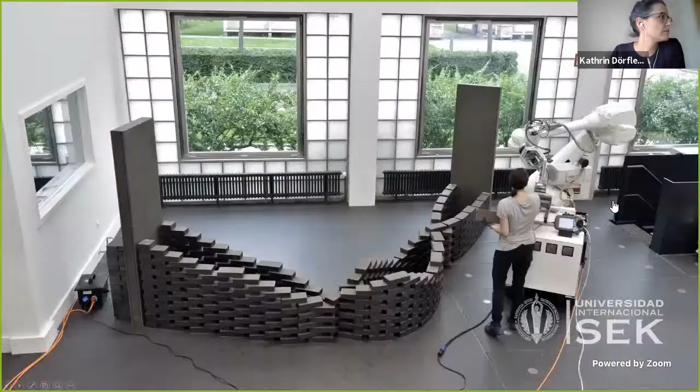I will start with a short video compilation of a few projects that I have been doing during my PhD period at Gramazio Kohler Research at ETH Zurich, in which we tried developing autonomous processes for robots, not in the lab, but as already mentioned, out at the building site.

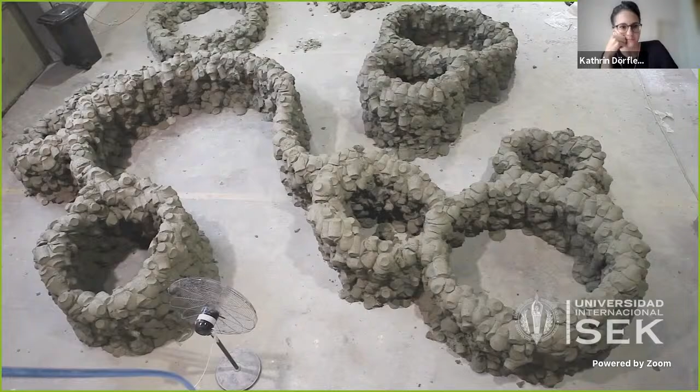So what we tried here was to bring robots out from the lab directly on building sites, and we did this in various processes with various technologies, with various different building processes.

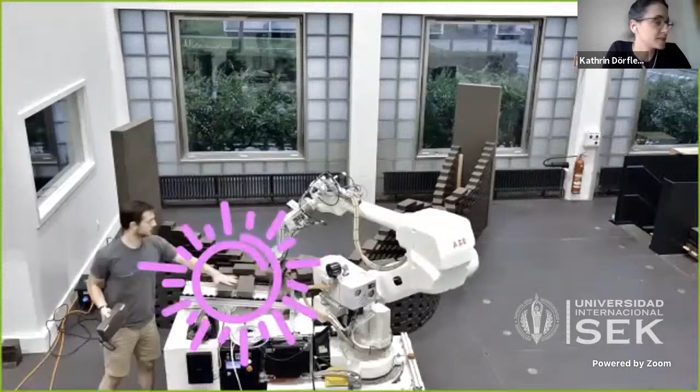And all of these videos have one thing in common, something that we have not been really focused on, but in retrospect is kind of important to recognize. And what they have in common is not the robotic part, but concerns basically the people, which you see popping in and out in the videos.

So I like to show these videos two times just to make it more apparent that in retrospect, when looking at these projects, one of the main questions that keeps appearing upon reflection is the following: if the manual material feeding and the robotic material placement is the ideal task distribution between humans and machines, or if we can do somewhat better.

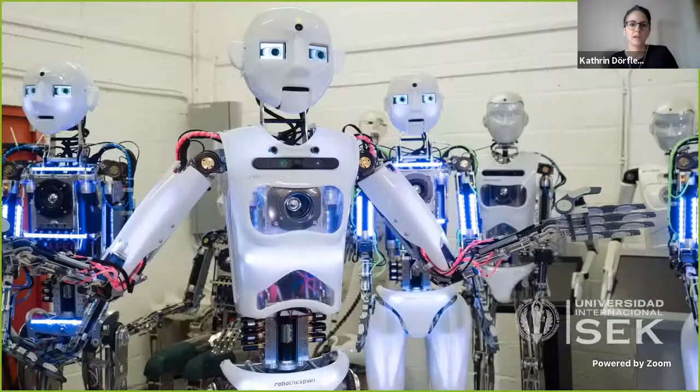So when we look at today's machines, they are not purely mechanical, but they are reprogrammable digitally. They can be connected with sensors and smart control algorithms, which ultimately radically expands their flexibility and their space for application. So if we want a hybrid human-robot team or a hybrid human-machine future and realize the vision of a collaboration between humans and machines, we think that the trick is to get humans and machines speaking to each other.

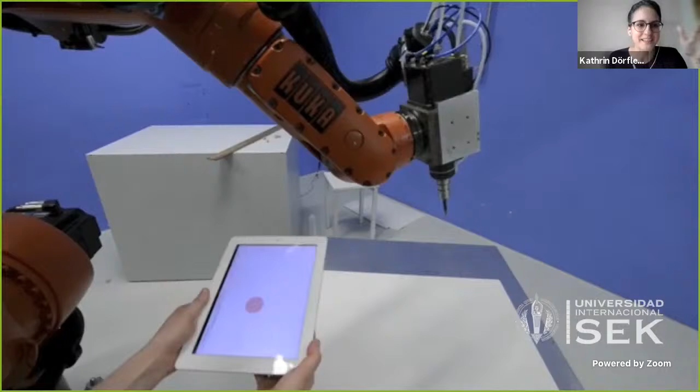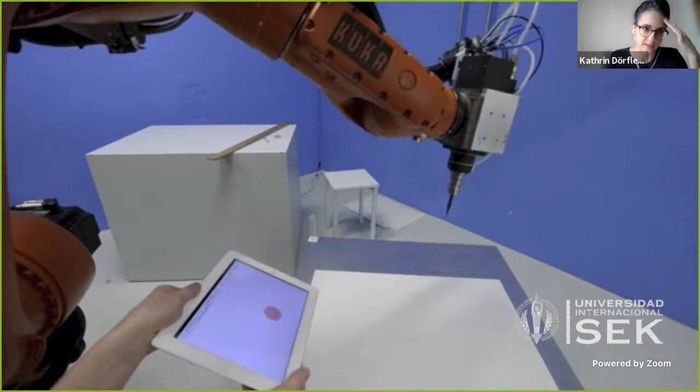So this is already more than 10 years back, where my colleague Romana Rust, a long-term colleague and collaborator of mine, and I were playing around in the architecture faculty's digital fabrication workshop, where we got this robot manipulator, and we were both caught by a fascination for these robots, but not as a tool for automation, but rather as an extension of the person's hand.

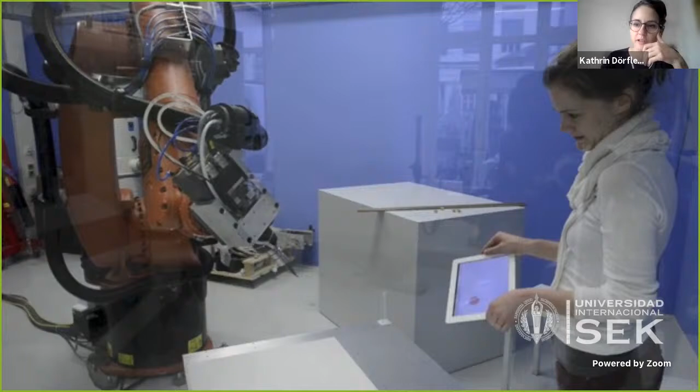So this was one of the first tests that we did. We used the iPad's orientation sensor to control the orientation of the robot's end effector in real time. And back then we started to envision the robot as a co-worker and an extension of a person, and in constant interaction, speaking to each other.

To explore questions along these lines, in a very early project, it was actually a master thesis, we developed a system which we named SANS, for Sensor and Actuator Network, which we thought is like no borders, very naive, I'm aware. But we envisioned basically a system where people and robots could be connected via various sensors,

like a camera, iPad, or 3D digitizer, bringing information from the physical world to the digital model, and to establish a possibility for humans to interactively take part in a fabrication process by enabling designing during fabrication and influencing and moderating digital fabrication processes while they are progressing.

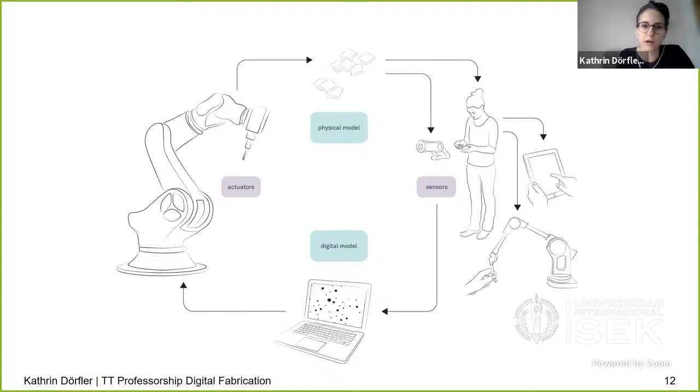So we established the communication between these different sensors and also the robot as an actuator, and we implemented a server-client application, which we were writing in a very crude way in Python. It was basically a requirement to implement a very open and extendable system, which would be easily adaptable to any sort of device. And in this application, we had a server which delegated data exchange between different sensors and actuators, and would also incorporate a model with different algorithms for moderating a fabrication process.

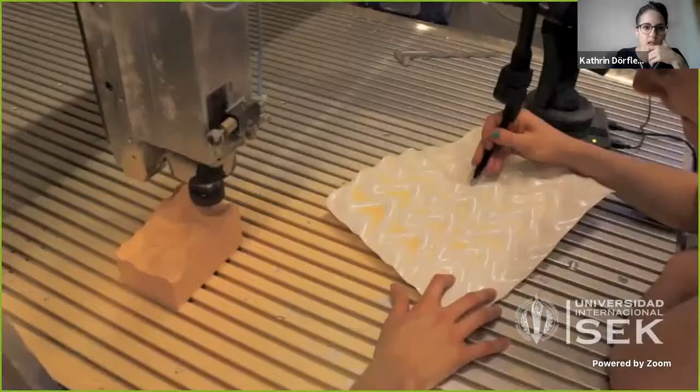We thought that this implementation was something very novel, but after a few years, we found out that this already exists in a way more mature form, developed all over the globe, which some of you are familiar with, which is called ROS, the Robot Operating System. However, our very rudimentary implementation at that time allowed us to connect any sensor input with various CNC machines or robot manipulators with a few modifications.

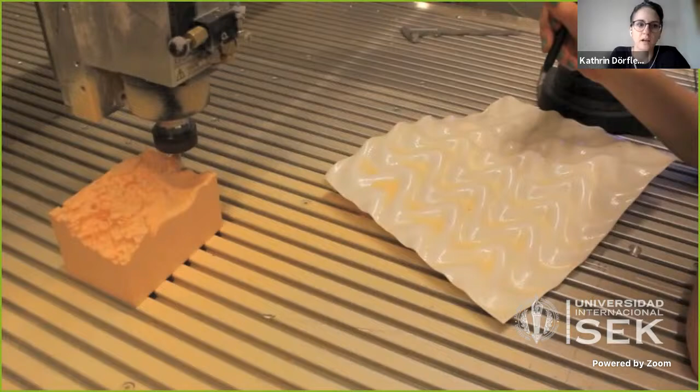And in this video, you can see a very first test in which we tried the simultaneous milling of a 3D digitized surface, where a person is actually scanning a differentiated surface, and a 3-axis milling machine is milling out the digitized surface at the same time. And what you can see here is that the scanning of the surface is a completely manual process. Therefore, the milling result is not a perfect copy, but it has these imperfections of the hand movements inscribed in the surface of the object.

Going a bit further, we started to explore this notion of real-time control and interactive fabrication by using various sensor feedback. And we explored algorithms which are based on sensor input and user interaction, although they are based on very, very simple rules.

You can see here how this robot is actually letting a thread fall on the surface, and it would follow an internal algorithm, but a user can intervene in the process and basically direct and sort of change the movement of the robot. You can see when the person is basically intervening by putting the hand on the surface, which is tracked by a camera.

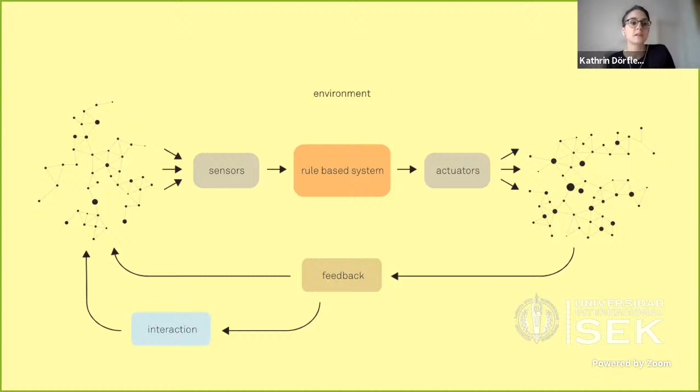And this, of course, was enabled by these various sensor devices, which helped monitoring the current state, where extracted parameters were used for input for the fabrication algorithms, and they also allowed for user interaction without using a dedicated external input device, but also through the direct manipulation of the physical object.

One last of these old videos, and I'll jump to the new ones, but I think it's important to get this background information. We ended up doing a project which we called stick piling, where a robot would pile sticks in a non-predetermined manner. So a user could basically place some sticks on the surface of this table, which then would be tracked by a camera from below the table.

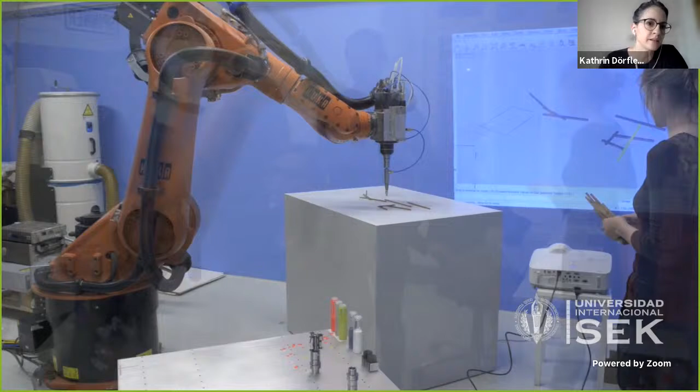And by placing an initial configuration, the user can basically define an initial state. And you could see Ryan Luke Johns, who was placing some sticks at the beginning. And then while the sticks are tracked, an algorithm starts to try to find basically stable configurations in starting to pile up the sticks. And you can see here in the background the digital model, and then here the physical counterpart.

And when a new stick is placed on the table, this would be detected. Then the algorithm would find a stable position on the already placed pile. And this process can basically go endlessly, and it would only stop if no stable position can be found, or a user can also intervene in this case and remove sticks or place sticks with different lengths, so that the process can continue successfully.

So I'm aware that these processes are very sort of rudimentary and very playful, but what we tried to do was to kind of open up this kind of determined design to fabrication by kind of creating these closed loop processes.

So there exists a very loose definition for autonomy for humans or machines, as the extent to which a system can carry out its own processes and operations without external control. And there exists also a more specific definition of autonomy in robotics, to be the extent to which a robot can sense the environment, can plan based on that environment, and then act upon that environment with the intent of reaching some goal without any external control.

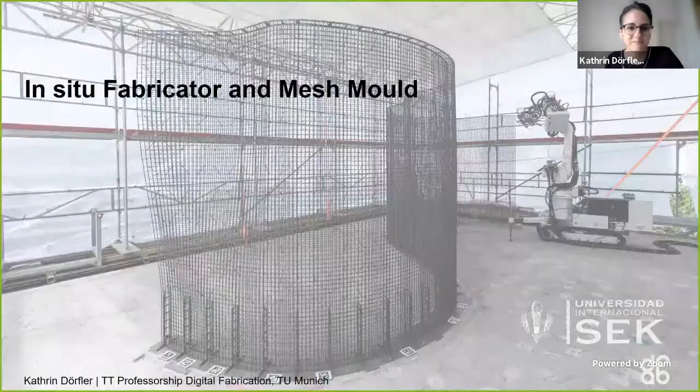And this approach of basically maximizing system performance with minimal human intervention was also something that I pursued mainly in the area of my PhD at ETH, where I basically dealt with this topic of bringing robots on site, and where this approach allowed us to realize projects such as Mesh Mould and In Situ Fabricator, which I will explain in a bit more detail.

This process, this robotic in situ process, applies a novel construction system for reinforced concrete structures with the name Mesh Mould. And this is a process in which a dense steel rebar mesh is fabricated, which acts as formwork for the filling of concrete and as reinforcement after the concrete is hardening.

And this fabrication technology was specifically chosen to show the full potential of robotic in situ fabrication. First, because it is fully load bearing, and the process facilitates the construction of geometrically differentiated and structurally informed monolithic structures in a material, but also a labor efficient way.

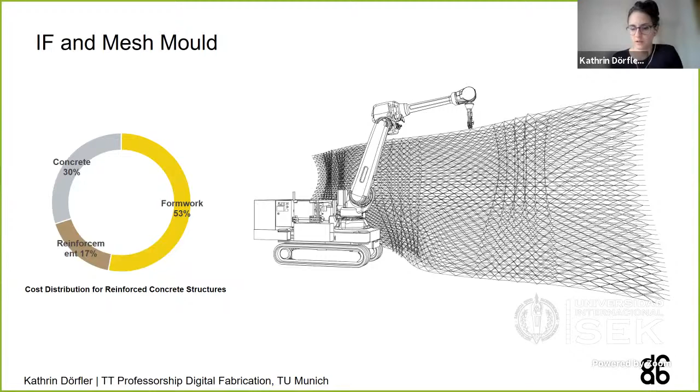So we developed a robotic end effector that can primarily assemble this free-form rebar mesh through bending, cutting, and welding. But this end effector also integrates a bunch of sensors. Here, a vision system, one for the robot's localization on site, and then a second one for surveying the fabrication and to cope with uncertainties on the way.

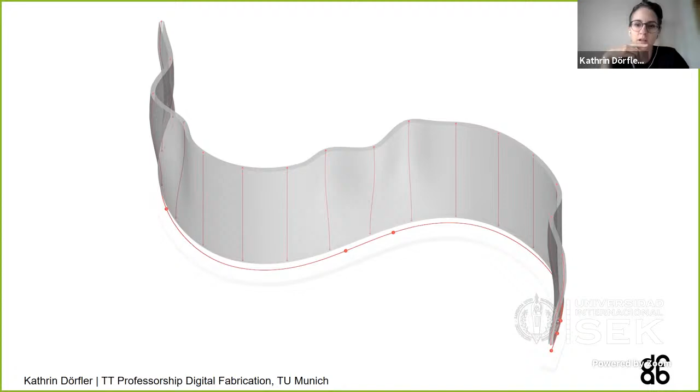So we developed a design tool for architects that allowed designers to create wall designs that are informed by fabrication-related constraints. The design tool allows the geometry of a wall to be locally undulated to increase the stiffness of the wall, with the goal to decrease the thickness and to produce the most slender geometry possible, given the load conditions of the upper two floors. And the model, of course, also includes all the fabrication information.

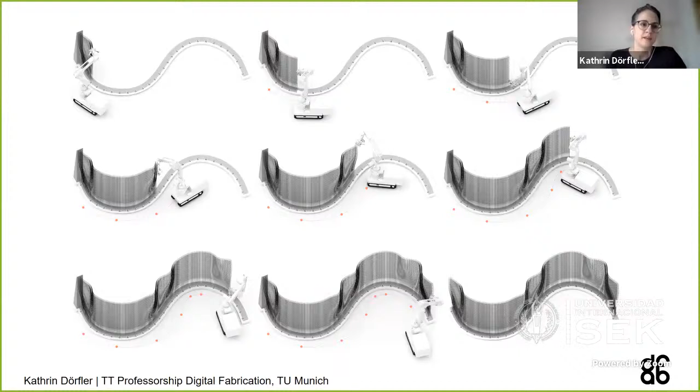This mesh is in contrast to the layer-wise 3D printing that you maybe know, in horizontal layers; this goes vertically, such that the mesh fabrication expands in the direction of the movement of the robot, which allowed to fabricate this mesh from 8 subsequent robot locations, in which at each location the robot had to be relocalized, which is done with this camera system looking at fiducial markers mounted at the

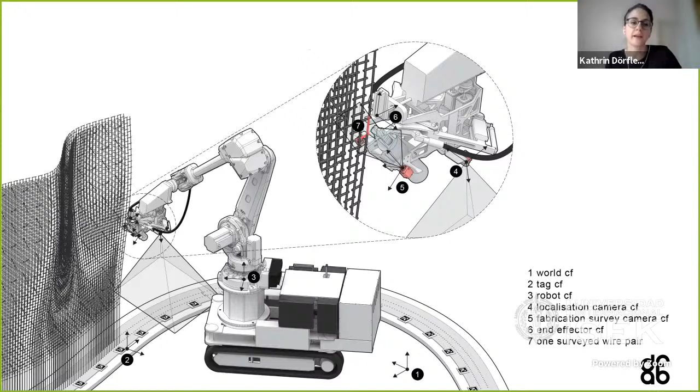base of the foundation, and by the second camera system, which is looking at the mesh directly, allowing the mesh contour to be sensed, registered, and then also to compensate locally for fabrication errors. So, for instance, the local deflections of the mesh, which occurred due to inner forces in the mesh fabrication, and also slight inaccuracies in the robot's localization.

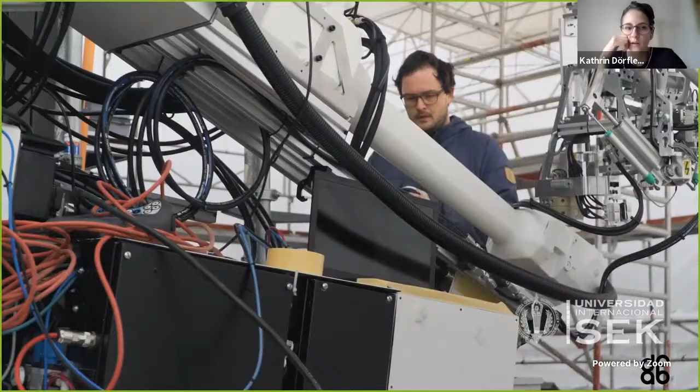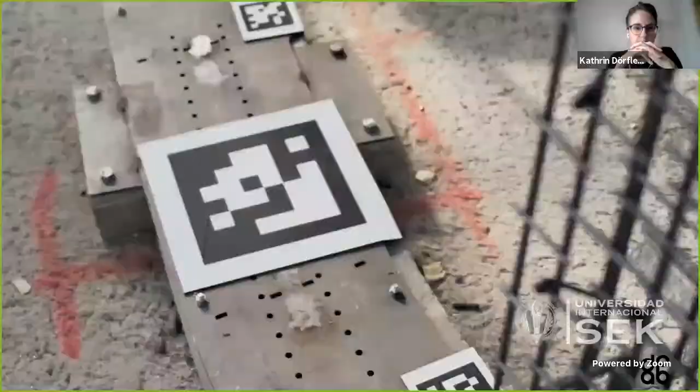This documentation shows the process from the moment of deploying such a mobile robot on site. You could see how it was transported with a container onto the platform where the house was built. It had to be housed because of weather protection. And here you can see the sensing system, which is tracking the fiducial markers at the foundations, such that the robot would recognize its location on site.

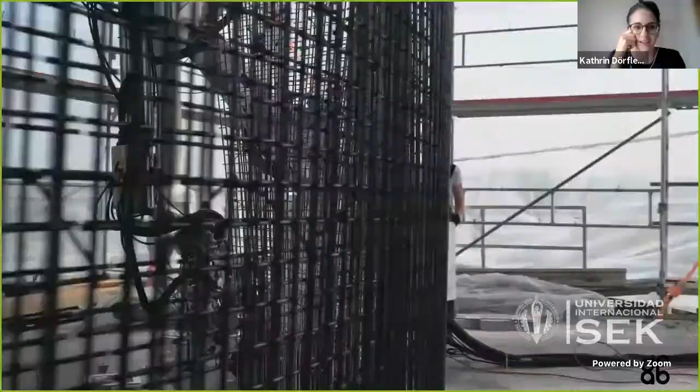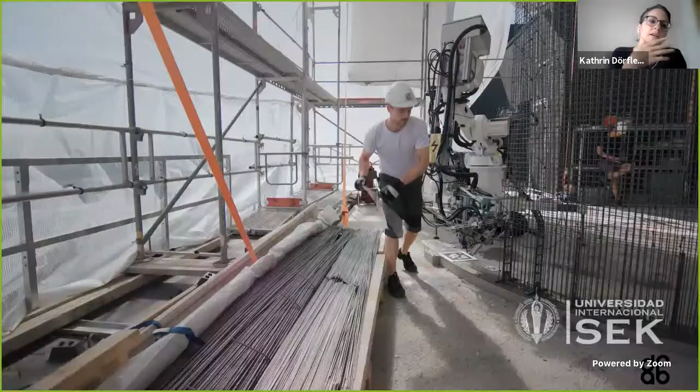And the welding process of the mesh, which is really like 3D printing, but just in a very loose way. And then the camera system, which would iteratively measure the mesh itself in order to compensate for any deflections that occurred as the fabrication went on.

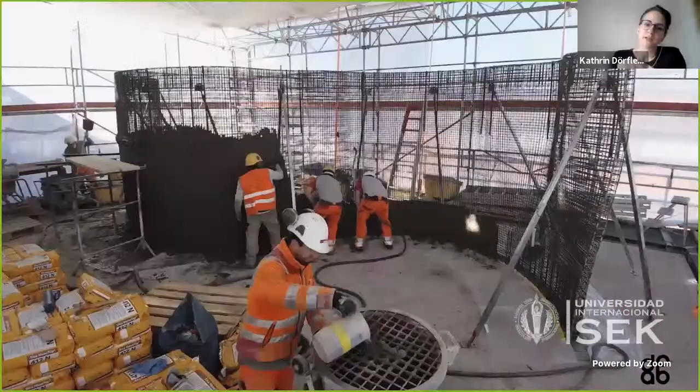So then the fabricated mesh is filled up by pressing the concrete in from the side and troweling the outside, and then also creating the smooth surface, where you can see that the construction actually really doesn't need a formwork and can be a fully load-bearing system.

Now, the accuracy of this fabrication process was validated by taking some ground truth measurements after the fabrication was finished. And we could prove that the deviations of the fabricated structure stayed well within plus minus 1.5 centimeters in comparison with the as-planned CAD model. But more than that, the process was fully autonomous and could be fabricated without causing collisions or without being reliant on any interventions.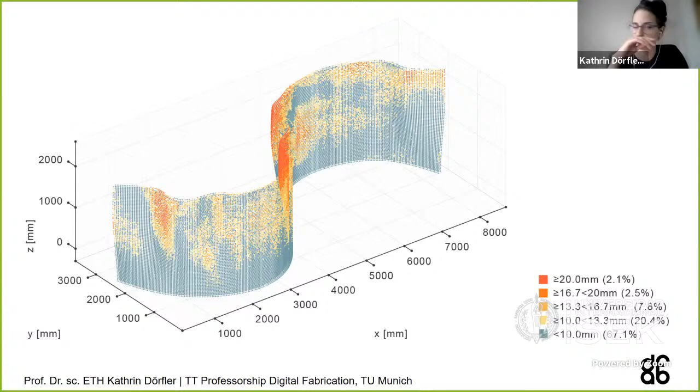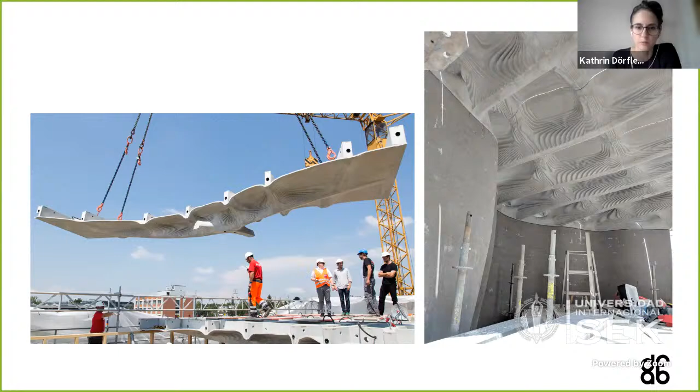This then allowed this prefabricated concrete slab called the Smart Slab of the Digital Building Technologies Lab to be installed in place on top of the wall without any adjustments. The wall thickness was, as said, only 12 centimeters in cross section, which is very slender, and was also taking the loads from the two-story timber unit, which was placed on top. And covered with this translucent insulating waterproof pillow foil to finalize the unit.

So while this project was a very unique chance to prove that in situ fabrication is not only a future vision, but that it is actually ready to be applied successfully in a real-world construction project, it has also been largely criticized that existing approaches to robotization usually aim at the complete substitution of human labor.

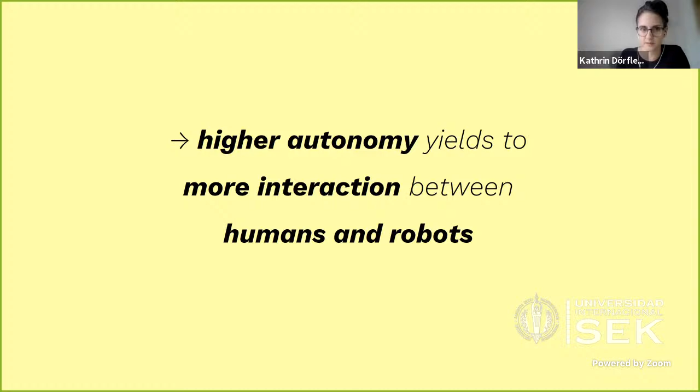And when you now remember what I said at the very start of the talk, there's a very interesting perspective in the field of human-robot interaction that suggests that if you create highly autonomous systems, there's a positive correlation between autonomy and collaboration. So that only with very high levels of autonomy of robotic systems, a balanced partnership can also be established, where humans and robots can work together on common goals with proper communication and complementing skills, allowing to explore and balance the level of autonomy and collaboration between all participating agents.

Okay, now I think my PowerPoint crashed. I'm quickly gonna restart.

Could you follow me until here? Yeah. Don't worry, Kathrin. Thank you. I should be right back. Okay. No, I just need to reshare my screen. Okay. Yes, right now we can see. Thank you very much. Okay, perfect.

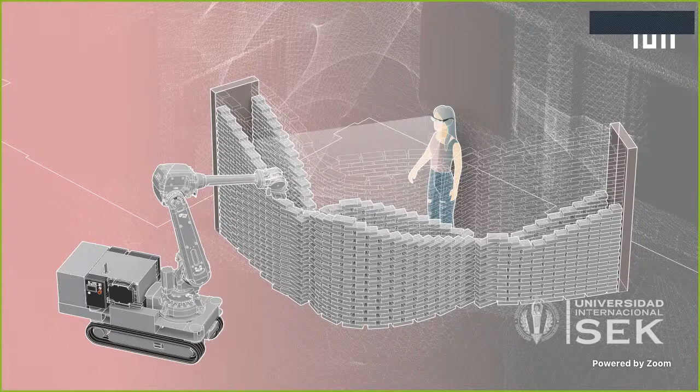So with a higher level of autonomy in robots and machines, we can actually start to explore and balance the interaction and the collaboration between participating agents, whether this concerns people or robots. So we turned to a completely different project after having basically realized this concept.

We turned to a more human-centered perspective, and we pursued an approach in the field of digital fabrication by hybridizing machine intelligence with traditional manual construction techniques, which has been shown in the project Augmented Brickwork, my latest project in collaboration with Gramazio Kohler Research as well.

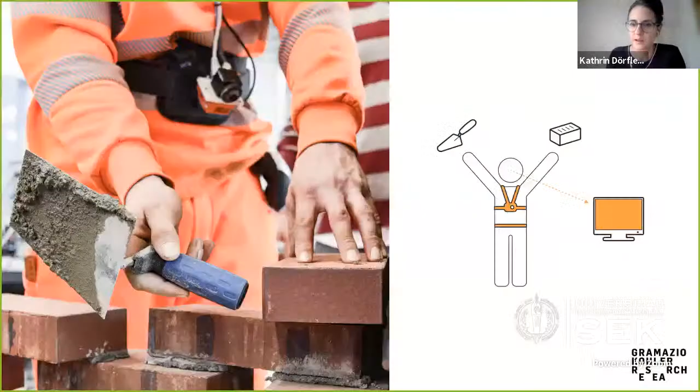We departed from the robotically fabricated brick facade of the Gantenbein Winery in Switzerland, which was built in 2006 by industrial robots, and we took this project as a major source of inspiration. But instead of fabricating such a geometrically differentiated wall robotically, Augmented Brickwork is moving away from robotic manipulation towards manual operation, in which craftspeople are guided by intelligent augmented reality tools to gain robotic precision.

So for this, we actually took the sensing system off the mobile robot. Timothy Sandy, who by now has founded a startup called Incon AI, so Instruct Construct, is a robotic scientist and a long-term colleague of mine. He developed a technology which allows to track discrete objects with a known geometry in space with very high precision.

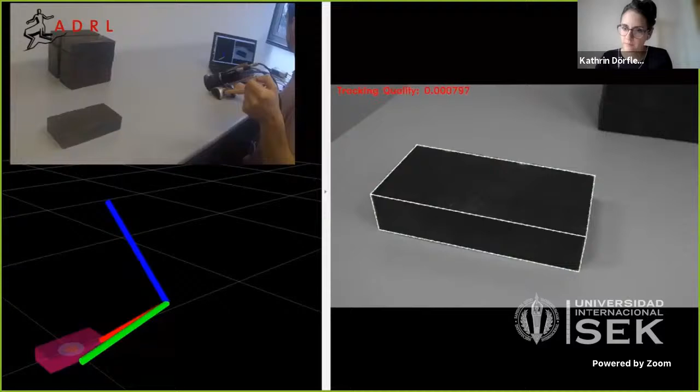And instead of using it to control mobile robots, as you've seen before, this is used to superimpose instructions on a video feed and to instruct humans to build complex shapes with high precision. I'm just going to play this video quickly so that you understand the concept.

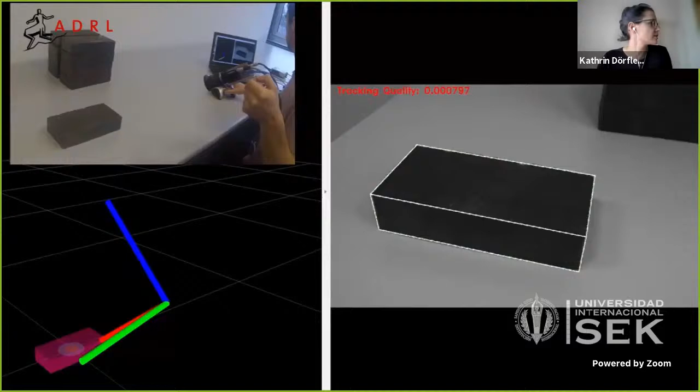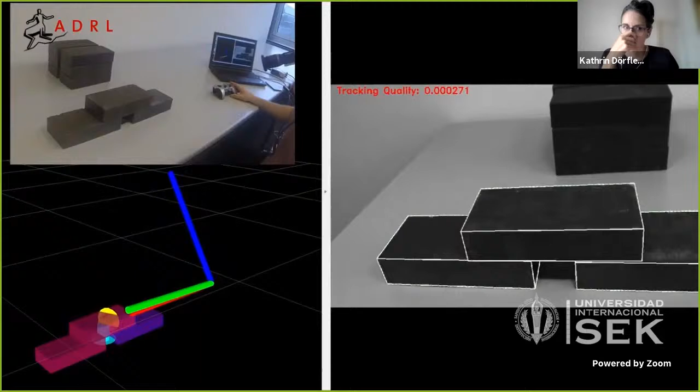In this sequence, a simple brick wall is built using the tracking system to guide the placement of the bricks. The desired geometry of the structure and the building sequence are pre-programmed into the system. When the user is ready to place a new object, the desired position of that object is projected in red into the images. Because of the accuracy and smoothness of the tracking estimates, this provides an intuitive reference to guide the user.

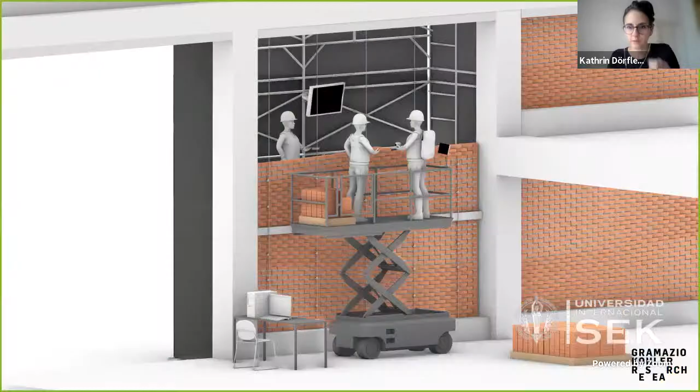So we investigated this technology for the traditional craft of bricklaying by translating very specific craft principles, such as, for example, knocking the brick into the mortar, into interactive visual instructions for guiding this knocking behavior. And we upscaled the technology for the construction of a brick facade, also for a winery, but this time not in Switzerland, but in Greece.

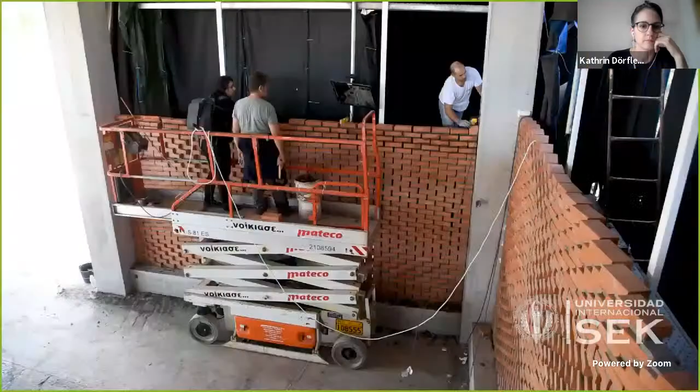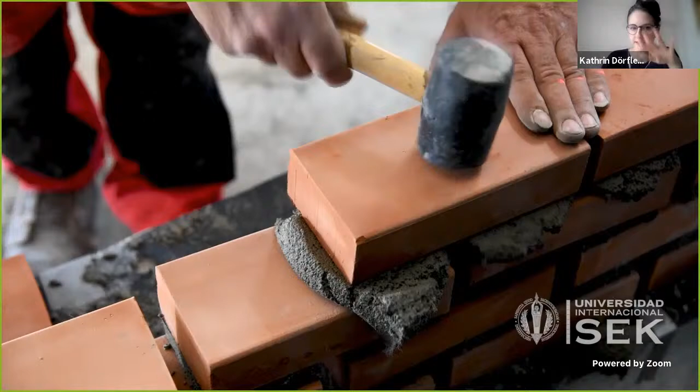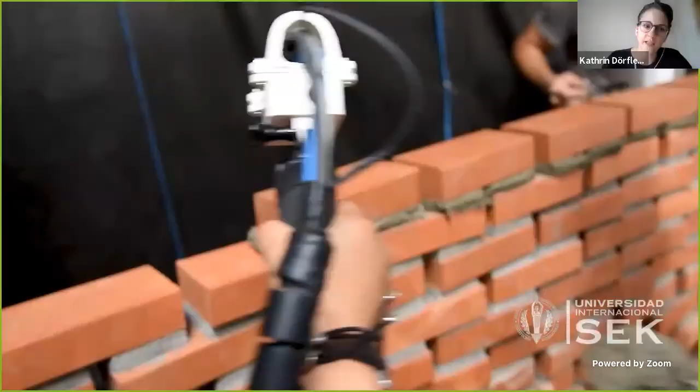Also here summarized in a video. You can see here the finished wall from the inside. And you can see here the bricklayer putting the mortar and placing the brick, knocking it in slightly, and then the brick as it is tracked in real time, and the arrows which indicate the locations as to where the brick has to be knocked into the correct location. And basically the length of the arrow indicates the strength of knocking.

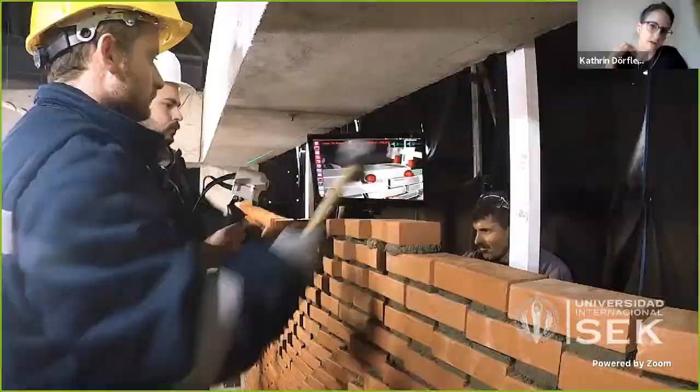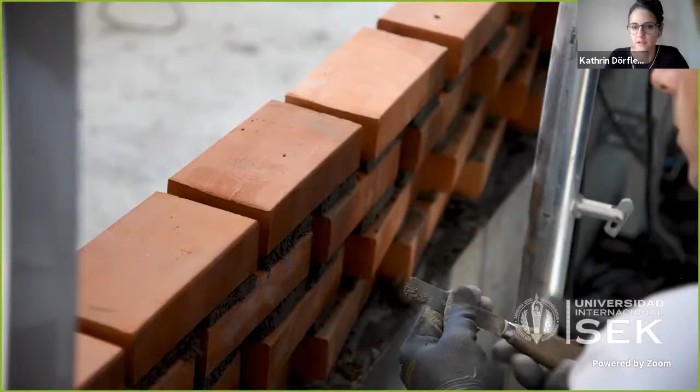We intended this to be a one-person routine, but we ended up actually having to have two people working in parallel. So one person who is putting the mortar and placing the brick, and the second person who is measuring the digital model of the facade. And then the finished facade from the outside.

You can see here how we created this shadow effect by varying the rotation of the brick, and also how this basically changes during the day depending on the location of the solar radiation. Also, the layers of the bricks are not horizontal, but they are curved, to increase this flowing appearance.

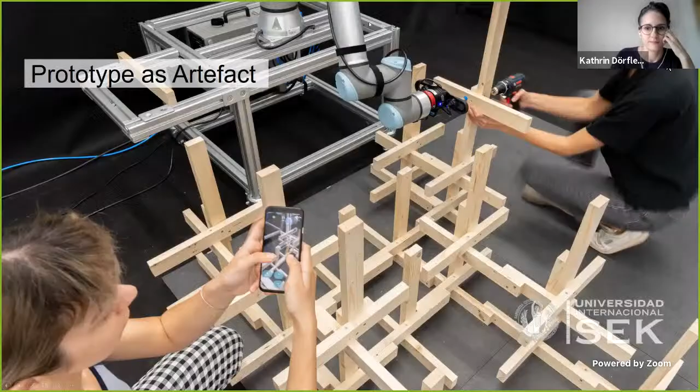So I have been teaching now at TU Munich for 1.5 years, and the first project that we started here in continuation of this idea of collaborative workflows is a project called Prototype as Artefact. It is a work by my PhD student Lidia Atanasova, who investigates new collaborative workflows between humans and robots to combine explicit machine intelligence with implicit human knowledge and creativity.

Again here, thanks to novel augmented reality technologies, two users and a robot collaborate in the assembly of a complex wooden structure in alternating physical actions. So the spatial timber assembly, which you can see here in this image, is being constructed by following predefined rules, or assembly grammar, as we call it, but is not planned at the beginning of the process; its configuration is instead designed during fabrication.

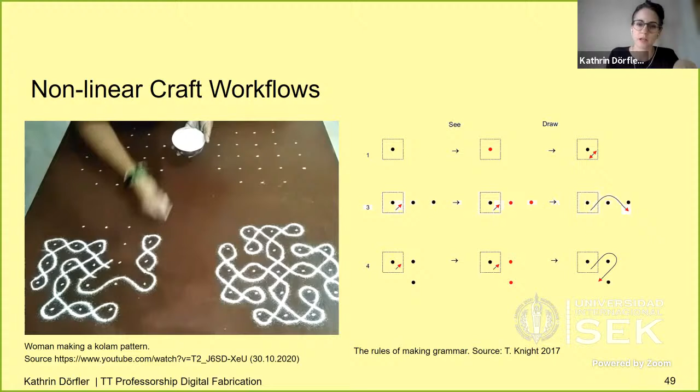Again, exploring and questioning the linear digital design of fabrication workflows by carefully looking at craft principles, such as shown here in this video, named the kolam pattern making, which was extensively described by a researcher named Terry Knight, which are based on a set of rules, but which are open and can change and be adapted during the process. For example, to pursue new ideas, to take errors into account, or to address some sort of material properties on the way.

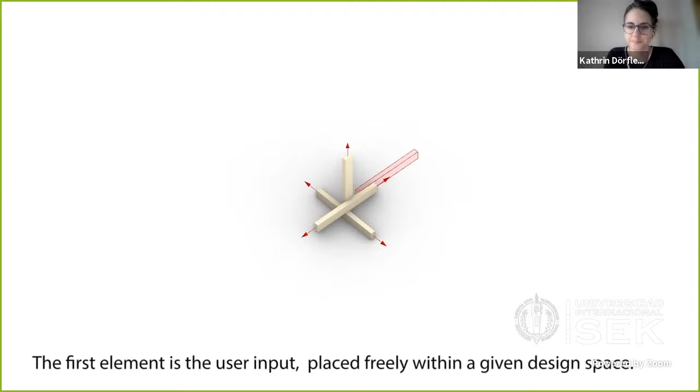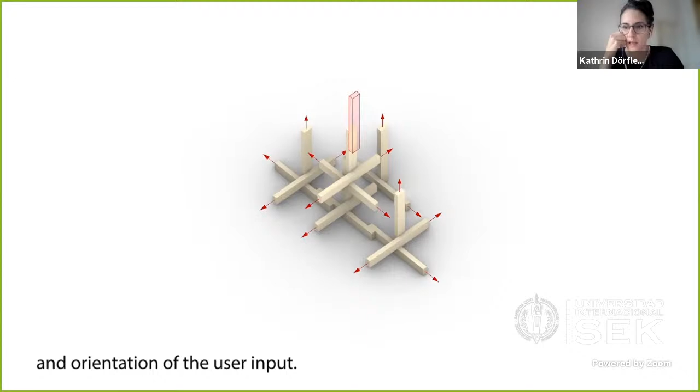Where making is not just doing, but is doing and sensing, and where the linearity of the workflow can be redefined into this sort of circular manner. For this, we have designed an assembly grammar, which describes basically rules for temporal processes. In this assembly grammar, elements are grouped into modules of 3, and the first element can always be placed freely by a user. And then this freely placed element is digitized, basically tracked by the augmented reality system, and is then completed by a robot which places the subsequent 2 elements to create this grid-like structure.

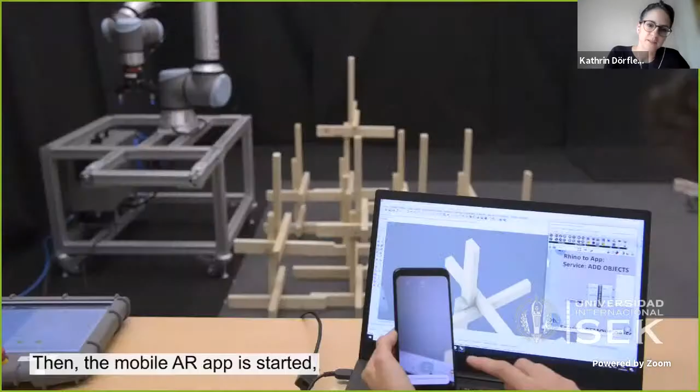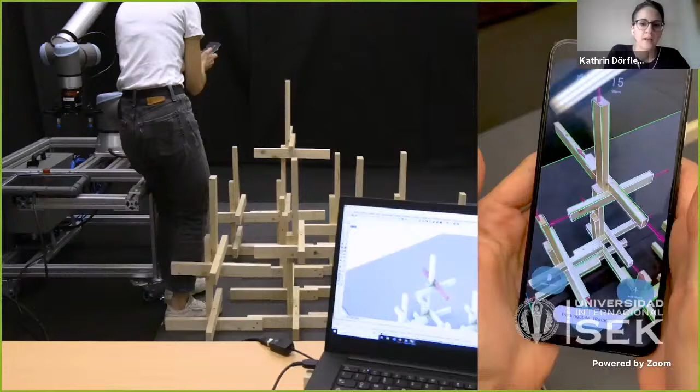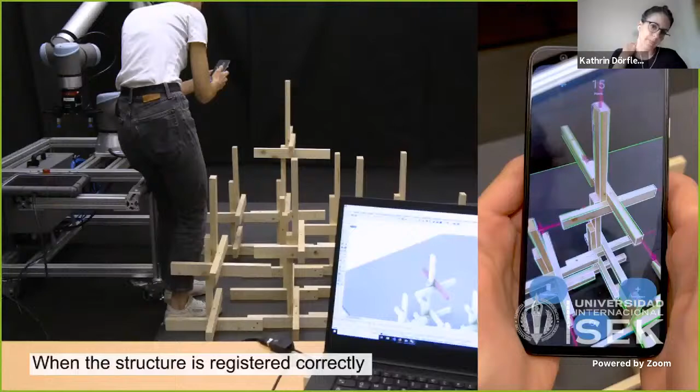And again, I'm showing a video. So the sequence starts by the user placing the element freely at any desired location. And then this physical action has to be digitized. For this, the user points the phone towards the structure, approximately at the right location so that the tracking can be initialized. And at this point, you can see the overlay of the digital model on the physical structure. It basically snapped to it by being registered correctly. And once the structure is registered correctly, the newly placed element has to be also registered.

Here you can see how the user can move the phone around freely, and how the user can also look at the information overlay. In this case, these kind of outlines and also the arrows. The arrows actually indicate possible continuation points of the structure. And now the newly placed element is also registered by the app. So now the user has to click Add Object to add a new object to the scene, and can also position it approximately at the right location. And at this moment, the tracking can be started. And then the exact location of the tracked element is fed back to the digital environment.

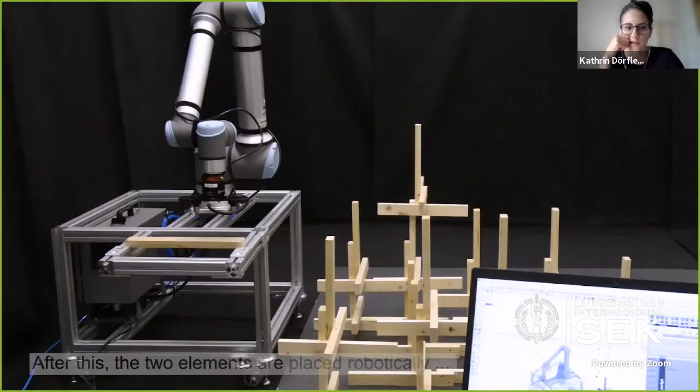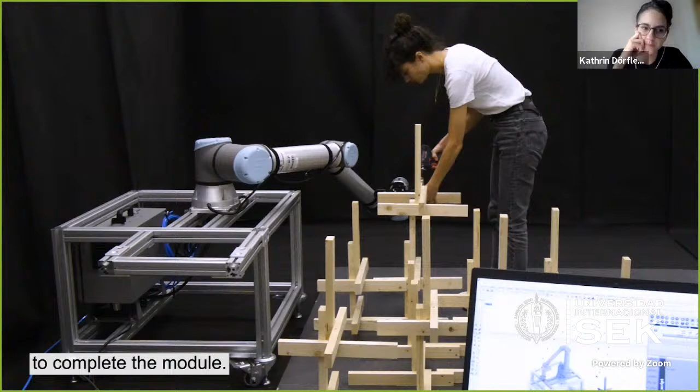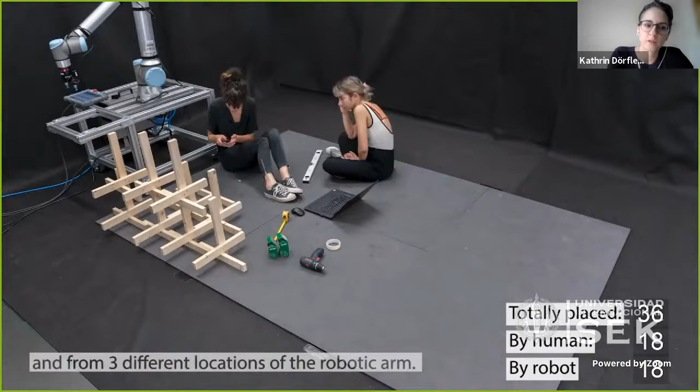So now the registered pose of the newly placed element, as shown in red, is the base for the 2 new elements that are placed robotically. And you can see here the robot, how it is simulating the process and then also physically executing it to complete this kind of cross structure. Again, here the person is fixing the element with a screw. And we fabricated this prototype of 102 elements on a construction area of 2.3 meters by relocating the robot 3 times.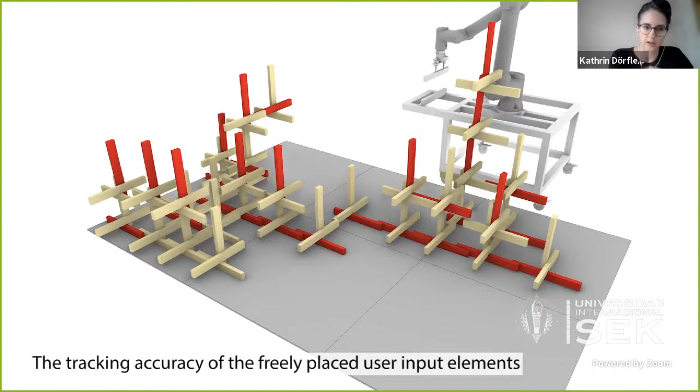So as you can see, this process is hard. It's hard to digitize physical actions continuously in order to put them into a digital model, and then to plan robotic manipulation procedures. You can see here that this process was done really stepwise. So doing something, sensing, registering, digitizing, planning robot routines, and then complementing the manual physical actions by robot physical actions. We would wish for this process to be all happening at the same time, but I think we are not there yet.

So I will close my talk with the last project, a little bit less technical, a project called Climate Active Bricks, which takes the idea of human-robot collaboration again to the construction site, and which is the result of a one-week summer school of our professorship. In this project, we investigated how climate-active properties of the most simple building material, which is a brick, in the outer shell of buildings can be released through the integration of computer-aided design, climatic simulation, and robotic production.

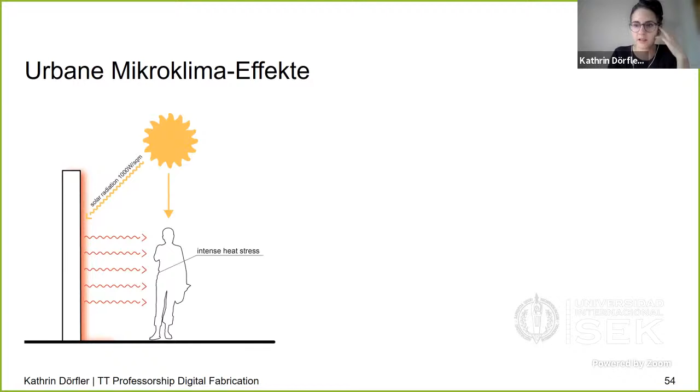Sealed surfaces of city walls that are directly exposed to the sun tend to radiate. You probably know this in cities which are heating up in summer. They radiate the received heat and create heat stress for city dwellers. The reduction in the solar radiation of such facades, for example through self-shading effects, could help to reduce the radiated heat and improve the local microclimate for residents in the outdoor urban environment.

So we have selected a location in the city of Munich, a southwest facade that is heavily exposed to solar radiation, as a location for planning and constructing a prototype of this approach, with which we could test and also verify this concept.

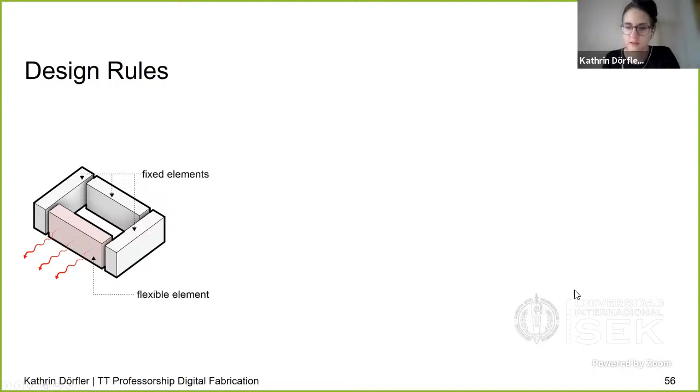We developed the design of the facade prototype on the basis of a rat trap bond masonry composite in which 4 bricks are arranged in a rectangle and laid in a hitched manner, creating a cavity in between. In this rat trap bond, we use 40% less mortar and 20% less bricks than conventional brick masonry. In addition, it allows the front of the brick to be translated, but also rotated, in order to create a self-shading effect.

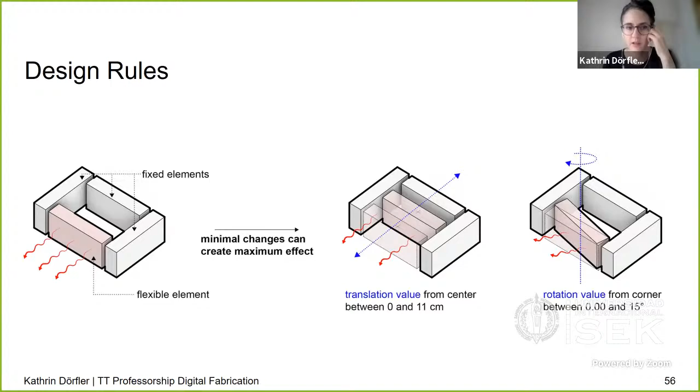So we used simulation tools where we analyzed various variations that affect the solar radiation of brick constellations. Without modification, you can see here how the full facade is exposed to the solar radiation, and by translating them to the back and then rotating them in relation to the sunlight, the value of the absorbed radiation can be reduced, which also leads to a reduction of the radiation and the heat load.

We then took the collaborative robot that can work hand in hand with people to the site to jointly lay the masonry. The precise laying of the stones, in which each individual position is precisely defined by the digital model, was carried out by the robot, and the mixing and laying of mortar and the grouting, a process which requires great manual skill and adaptation to external conditions, was carried out by the students with whom we built up this wall. This enabled an intuitive workflow between the precision of the robot and the skill and the craft of the people involved.

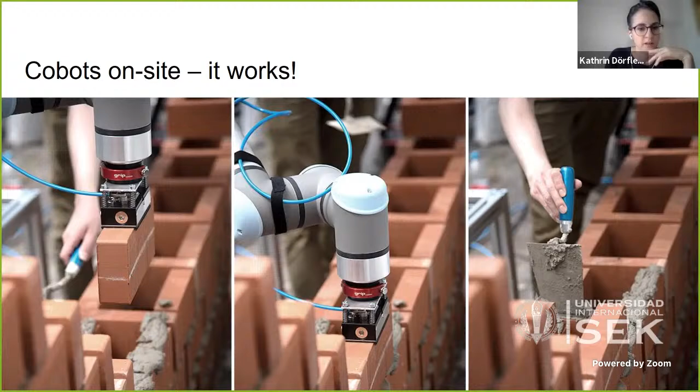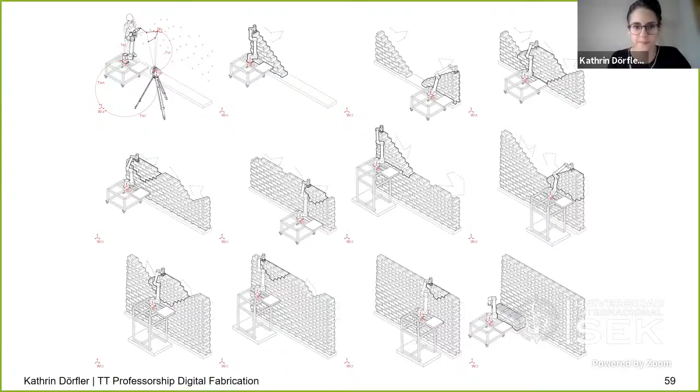Here we didn't use any kind of automated sensor system; we basically just measured in the robot by hand by measuring point coordinates, which allowed us, in a very analog way, to relocate the robot during construction. And again here, summed up in the video, which is the last.

In the context of climate change and especially of sealed surfaces in very dense urban environments, microclimates are a very sensitive, important aspect of our well-being. It's already well accepted that cities are shaping the microclimate, and the microclimate is shaping how people are using and experiencing the cities and the urban environments. One of the effective methods to encourage people to use the public space is to give them comfort opportunities, meaning to create cold spots in the city to recover from the heat stress.

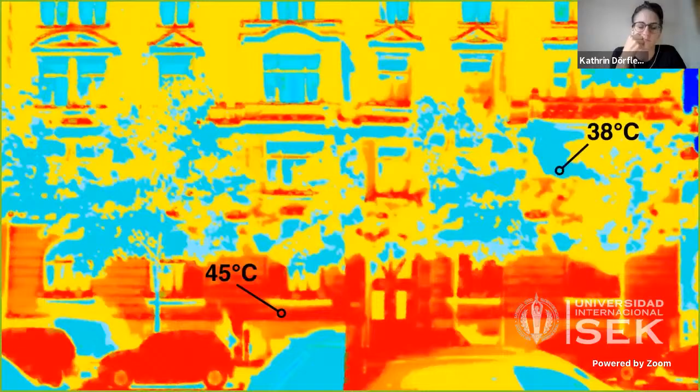This can be done either by planting trees or creating surfaces with minimized solar exposure. Sometimes we cannot increase the greenery of our cities, so we need to lower the surface temperature of our urban walls. We do this by adding a shadow surface, so we can lower the surface temperatures by creating shaded walls of our buildings. The project Climate Active Bricks is about combining the research field of improving urban microclimate and the field of robotic fabrication. Robotic fabrication allows us to directly fabricate from a digital model. So the geometries that we generate by utilizing simulation tools can directly be fabricated one-to-one by a robotic arm.

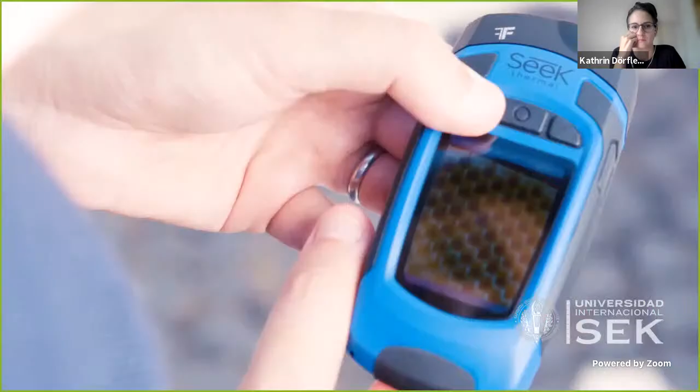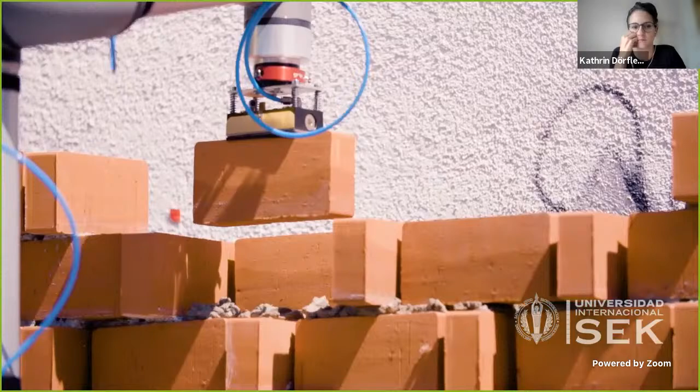The Climate Active Bricks project is a good example of an experiment enabled by digital tools through the entire design process, from conceptualization to fabrication. So with this project, we also tried to combine human craftsmanship and robotic fabrication. We actually use the robotic manipulator only for the precise laying of the brick, whereas other tasks like putting or mixing the mortar we would combine with the students' work.

When we perform the simulation, the goal is to reach the minimum solar exposure. That means that the geometry of the brick wall results in a geometry where each brick has an individual location. So it would be very difficult for a human to build this wall. So in this case, we exploit robotic fabrication because it allows us to directly take the result of the simulation and fabricate it with millimeter accuracy.

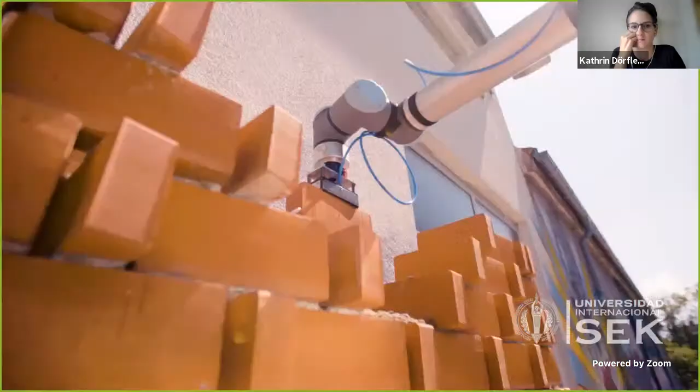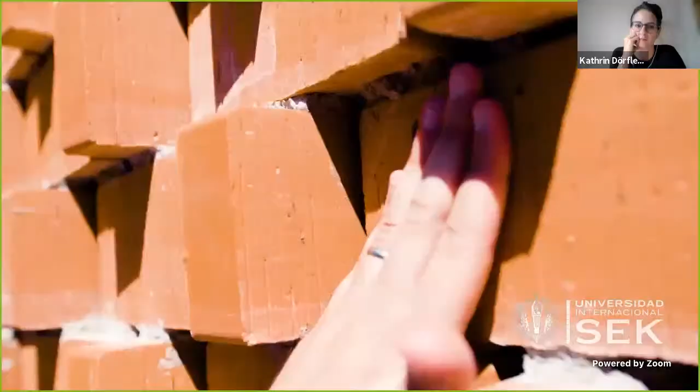We improve the human comfort level by lowering surface temperature in the urban context. So far, we can say that the lowered surface temperature reduces the heat stress on the human body. Normally, our urban walls are very flat surfaces. So by creating a staggering pattern of brick walls, we generate self-shadowing effects in the wall that allow us to reduce the surface temperature of that wall. Promoting people to use the public realm is highly dependent on how walkable, comfortable, and healthy we plan our cities.